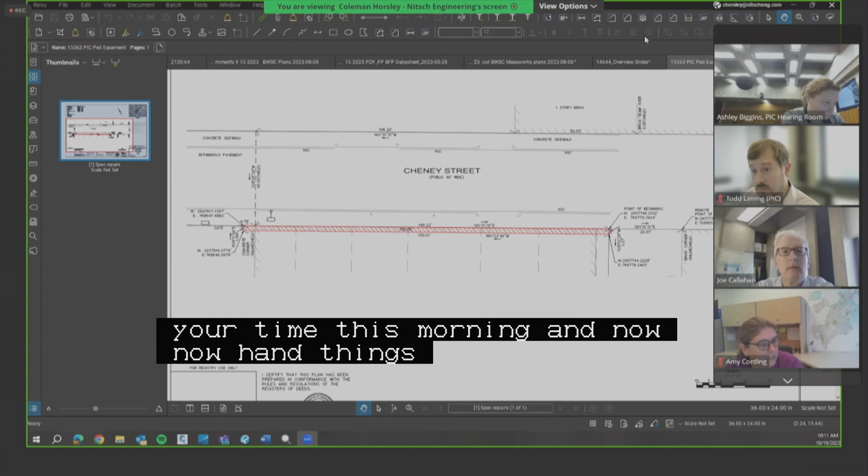As you can see on the screen right now, the first item is the pedestrian easement. We are proposing to set up a pedestrian easement to allow for a minimum of 5-foot accessible walk along Cheney Street. The easement limits are shown in the plan in front of you. There are no changes from the previous new business hearing.

Excellent, thank you very much. Commissioners, questions, comments? PIC staff or members of the public? PIC staff is all set. I will take this opportunity to remind the public, if you wish to ask questions or offer testimony, please use the raised hand function at the bottom of your screen. But I do not see anything at this time.

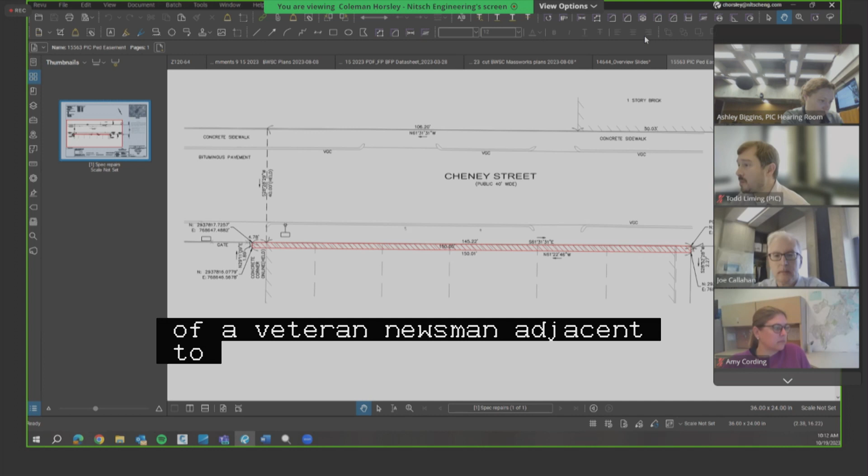Seeing none, do I hear a motion to approve public hearing number 1? I'll make a motion to approve a petition by Cheney Schuler LLC for the acceptance of a pedestrian easement adjacent to Cheney Street as read in the record by the chair. Second. All in favor? Aye. Aye. Aye. Any opposed or abstain? So moved.

On to public hearing number 2, a petition by Cheney Schuler LLC for the making of specific repairs within Cheney Street Public Way, Roxbury, located on its southwesterly side at address numbers 4 through 18, generally between Blue Hill Avenue and Hartwell Street, consisting of curb and sidewalk reconstruction, as well as new and relocated street lighting infrastructure, street trees, and driveway curb cuts.

This was new business on October 5th, as shown on a set of plans entitled City of Boston Public Works Department Engineering Division Specific Repairs Plan 4 through 18 Cheney Street, Roxbury, 2 sheets dated September 2023. Will the petitioners please reintroduce themselves and their affiliations and walk us through this action along with any changes that have been made since your last hearing?

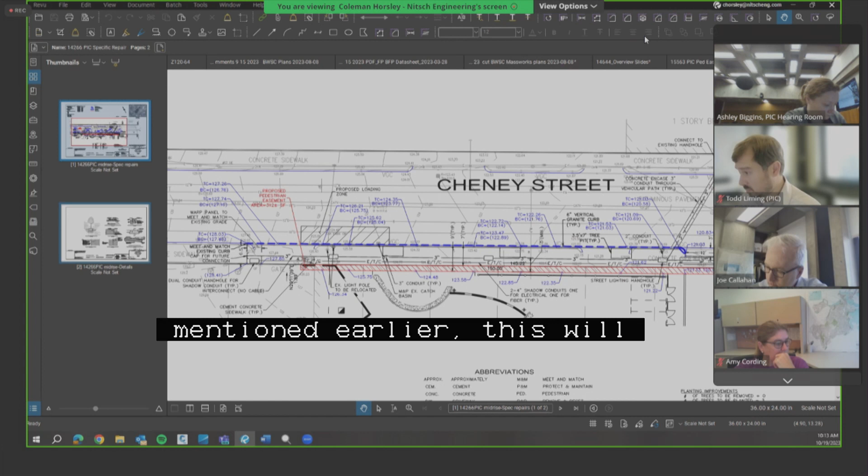Thank you. Again, Coleman Horsley, Nitsch Engineering, engineer of record for the Cheney Street project. This specific repair request is an extension of the sidewalk, so we are removing the existing building. As Ricky mentioned earlier, this will increase the sidewalk width for easier pedestrian access. As a result, we're also able to add 3 street trees as part of this process. We are providing a minimum of 5-foot clear width for the sidewalk behind the street trees and overall sidewalk width of 9 feet, including the street tree locations.

Also, we are revising the street lighting infrastructure and upgrading it to the newest standards and adding 2 street lights with crossings across Cheney Street. The curb will be reset and there will be a proposed loading zone out front for the PACE neighborhood citizens. Shadow conduit will be added in accordance with the Boston Smart Utilities program. There have been no changes from the previous new business hearing.

Thank you. Commissioners, questions, comments? Your loading zone should be signed but not striped. Sounds great. We'll do that.

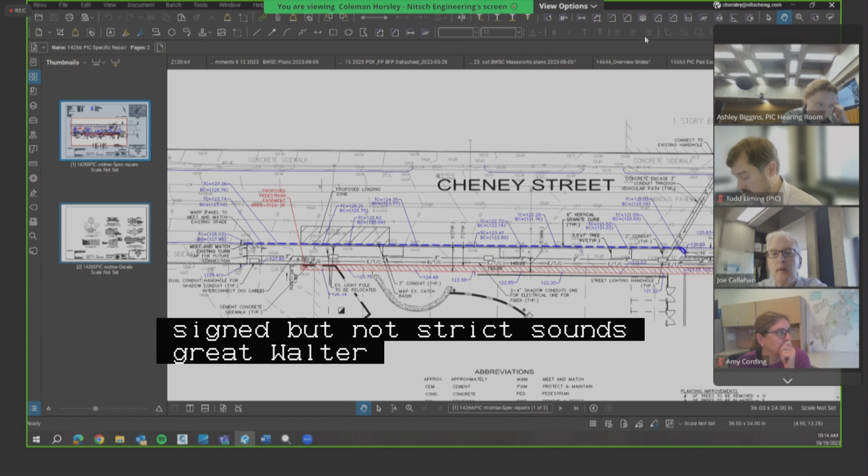Any other questions, comments? PIC staff or members of the public? All set? All right, do I hear a motion to approve public hearing number 2? I'll make a motion to approve a petition by Cheney Schuler LLC for the making of specific repairs within Cheney Street as read into the record by the chair. Second. All in favor? Aye. Aye. Aye. Any opposed or abstain? So moved. Thank you very much. Thank you.

On to public hearing number 3 on a petition by NStar Electric Company, DBA Eversource Energy, for the making of specific repairs within the following public ways in Dorchester and South Boston, consisting of curb realignment and reconstruction of the roadways, sidewalks, pedestrian ramps, and driveway curb cuts, as well as new and relocated storm drain infrastructure, speed humps, and raised crosswalks: Plaisted Road between Springdale Street and Savin Hill Avenue, Savin Hill Avenue between Plaisted Road and Denny Street / Grampian Way, as well as between Grampian Way / Evandale Terrace and Old Colony Terrace, Caspian Way at Savin Hill Avenue, Denny Street at Savin Hill Avenue / Grampian Way between Savin Hill Avenue / Denny Street and Savin Hill Avenue / Evandale Terrace, Evandale Terrace at Savin Hill Avenue / Grampian Way, Old Colony Terrace between Savin Hill Avenue and William T. Morrissey Boulevard.

Monsignor Dennis F. O'Callaghan Way, generally between Old Colony Avenue and Kemp Street, Dr. Michael Gavin Way at Monsignor O'Callahan Way, Kemp Street, generally between Monsignor O'Callahan Way and Major O'Connor Way, Major Michael J. O'Connor Way between Kemp Street and Dorchester Avenue at Major O'Connor Way, Father Songin Way, Father Anthony Songin Way between Dorchester Avenue and Boston Street, generally between Father Songin Way and Ellery Street.

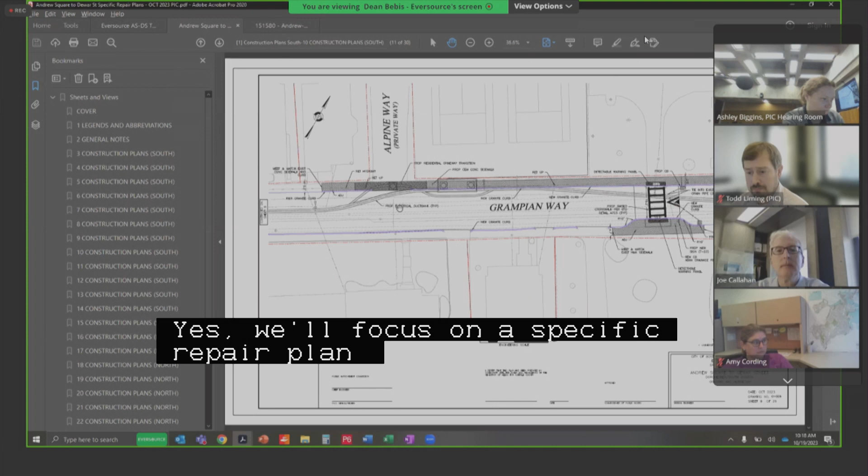That sounds good, so I will open the specific repair plan. We'll focus on the specific repair plan first, and then the next action will focus on the grant of location plan. This is the specific repair plan. I will scroll quickly through the work and then focus on our mitigation efforts. Can everybody see my screen?

Yep, okay excellent. So here we are starting in Springdale, the northernmost section of the site. We travel through Plaisted Road, then we head on to Savin Hill Ave.

And here we begin our portion of mitigation effort, with these additional curb lines and sidewalk repairs. This is no change for new business, so this is part of our mitigation effort here, with a few catch basin movements, curb lines, and additional crosswalks. Any questions on this page?

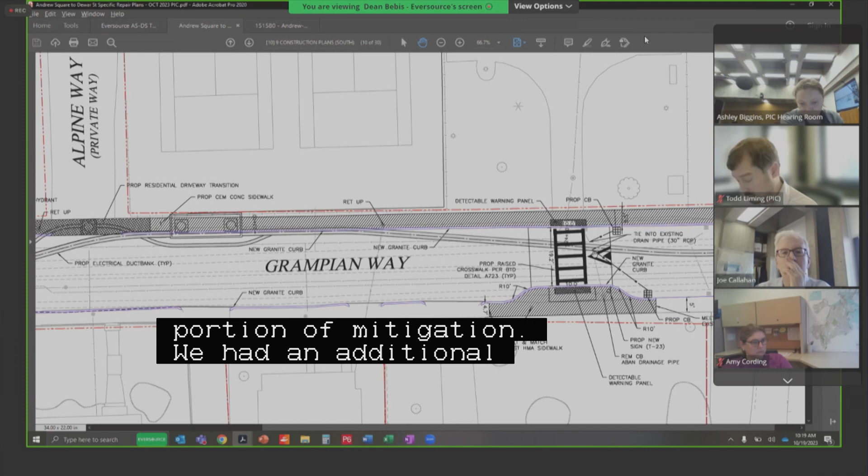Okay, thank you, moving on, Grampian Way. This is a new aspect from our previous specific repair plan. We have specific callouts for the protection and potential adjustments to the pavement adjacent to these ancient trees. I believe this was included by the Parks Department, so this was included in our specific repair plan update.

Okay, moving on, we have these rebuilds. Nothing new here except additional mitigation to protect these trees and root systems with our sidewalk. We will have an arborist on hand when we're excavating. Our bond crew will excavate in such a way to protect the tree and its root system. We do have our licensed arborist, Chris Hayward, on the phone, and he will be attending the project construction to ensure the protection of these trees.

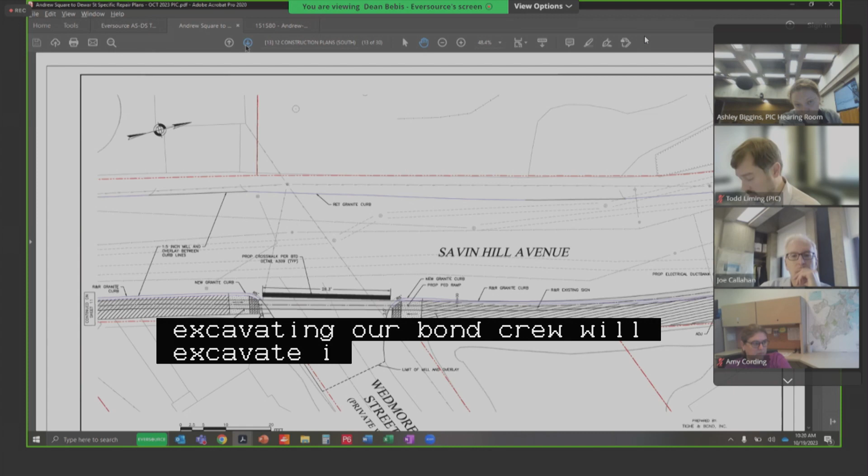Savin Hill, no updates. Savin Hill Ave, based on the comments we received last week, we moved our crosswalk to align with the existing crosswalk. You can see the existing ladder here, and our new ladder will be in the same spot, similar to what's existing. But this is a new raised crosswalk, which was mitigation, and then here we have another speed hump.

Okay, now we're moving on to the intersection between Old Colony Terrace and Morrissey Boulevard. No new updates here. We're going to be moving on to the MEM, Mary Ellen McCormack, and as part of our discussion with additional ramps, I will go through the additional portions or modifications to the specific repair plans since new business.

Here we're going to repair a piece of this ramp, concrete flange, and these are a culmination of a few site visits with the city about the pedestrian ramps to ensure that all pedestrian ramps are up to code along the route.

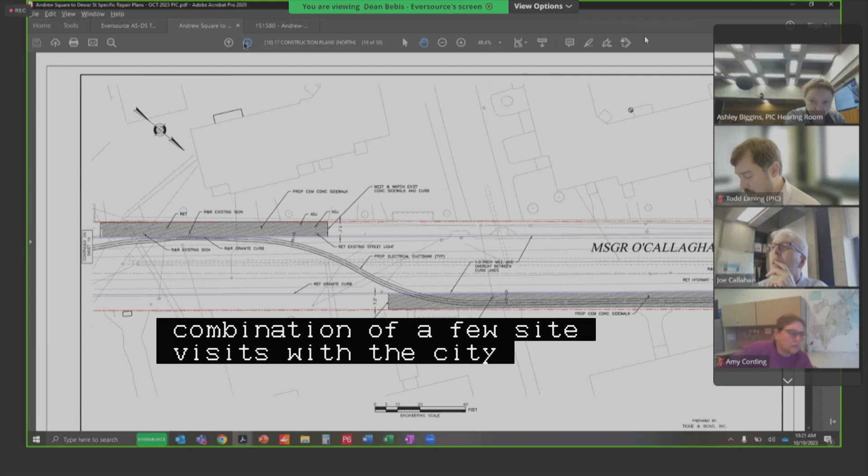No new updates here. Here we're replacing several DWPs, which are detectable warning panels, as these are not meeting code, and you can see them highlighted, I can zoom in. Ongoing, again you see some callouts here, additional repair of a DWP, 2 additional DWPs in Kemp Street.

And then also we have additional DWP repairs here, concrete flange here. These 2 DWPs and this concrete flange will be repaired. Those are new.

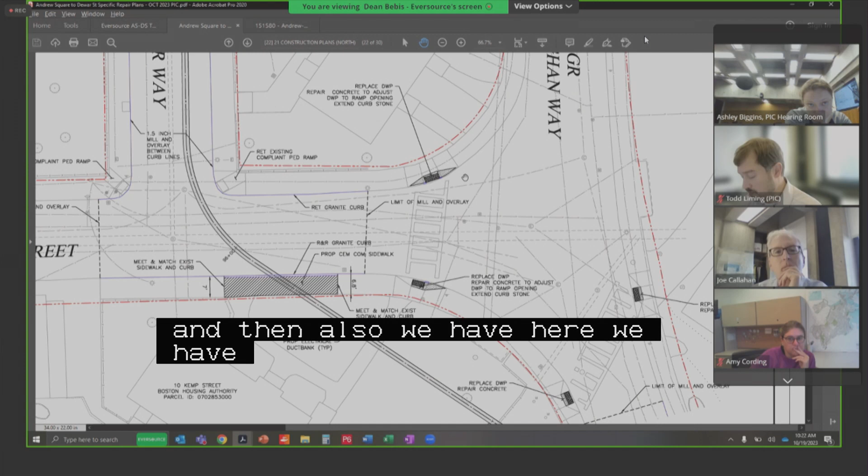Sidewalk repair, nothing new here. Sidewalk repair. This intersection, we're repairing this and a potential curb line here on this DWP.

Do you mind, was it with the curb ramp team? We met out there with Mike, I forget his last name. Mike Sinclair? Mike Sinclair, yeah. Great, okay. Really, really great, great to work with. So, fantastic, this was a combination. Thank you. Okay.

All right, and this is the completion into Andrew Square. Any questions from the commissioners?

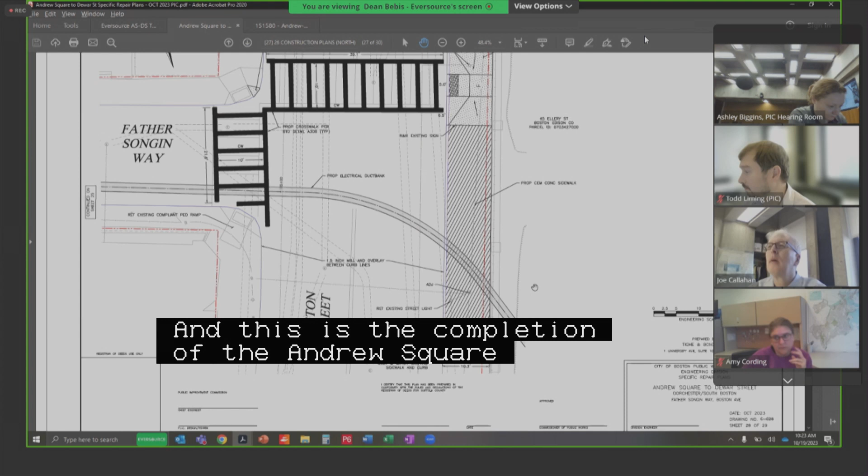No, I just wanted to also note that Eden from the Eversource team reached out to us regarding accessible parking spaces along O'Connor Way, and we're working through the details on that and looking forward to diving in to ensure that those parking spaces are relocated for construction. Absolutely.

Okay, no more questions. If there's no more questions, commissioners, I'll move on to the GOL. We need to vote on the specific repairs first. Let me just check with Todd, PIC staff, members of the public. Anyone else have a comment or question? I'm all set. Amy, was that you that chimed in? Yeah, no, we're all, I mean, these are largely our asks, so we're good. Yeah, I think we're all set.

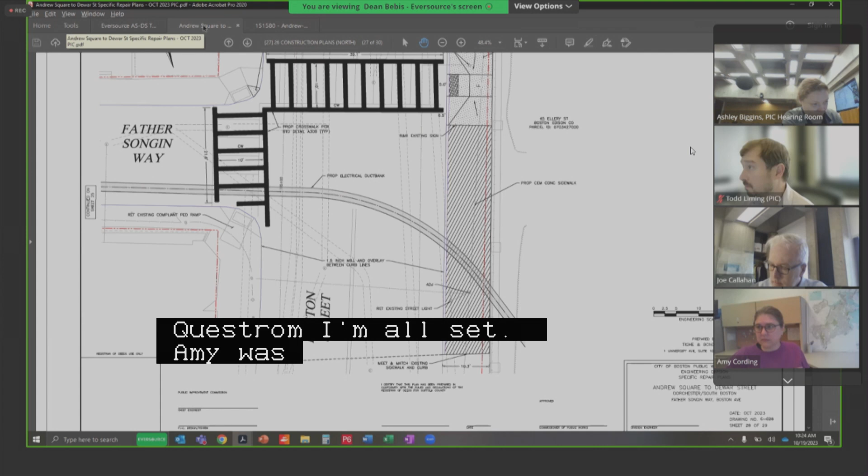All right, I will just say I very much appreciate all the effort that's gone in here. This has been a very long process, and I appreciate the folks at Eversource working through these many streets with us and getting to a reasonable mitigation plan for the residents that will be affected by this construction. So thank you for that. And with that, do I hear a motion to approve public hearing number 3?

I'll make a motion to approve a petition by NSTAR Electric for the making of specific repairs in Playstead Road, Savin Hill Ave, Caspian Way, Denny Street, Grampian Way, Evandale Terrace, Old Colony Terrace, Monsignor Dennis O'Callaghan Way, Dr. Michael Galvin Way, Kemp Street, Major Michael O'Connor Way, Dorchester Ave, Father Anthony Songin Way, and Boston Street as read into the record by the chair.

Second. All in favor? Aye. Aye. Aye. Any opposed or abstained? So moved. On to public hearing number 4.

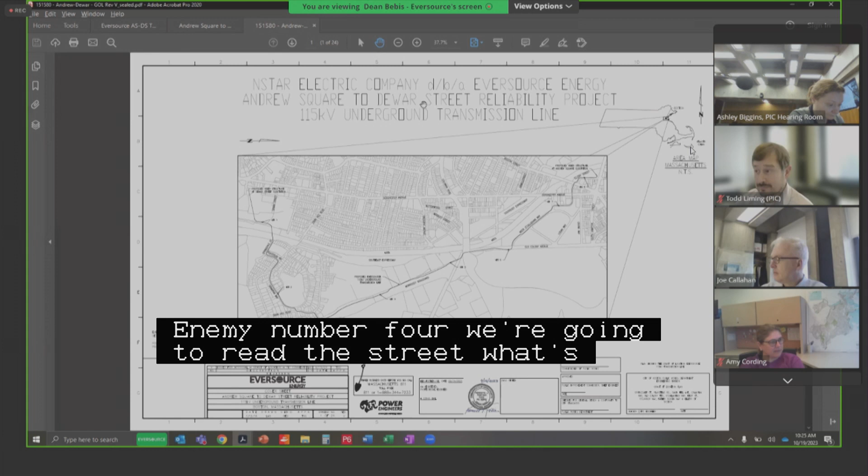We're going to read the street list again. Here we go. On a petition by NSTAR Electric Company, DBA Eversource Energy, for a grant of location to install a new electrical transmission line and associated infrastructure within the following public ways in Dorchester and South Boston: Playstead Road between Springdale Street and Savin Hill Avenue, Savin Hill Avenue between Playstead Road and Denny Street / Grampian Way, as well as between Grampian Way / Evandale Terrace and Old Colony Terrace, Grampian Way between Savin Hill Avenue / Denny Street and Savin Hill Avenue / Evandale Terrace, Old Colony Terrace between Savin Hill Avenue and William T. Morrissey Boulevard.

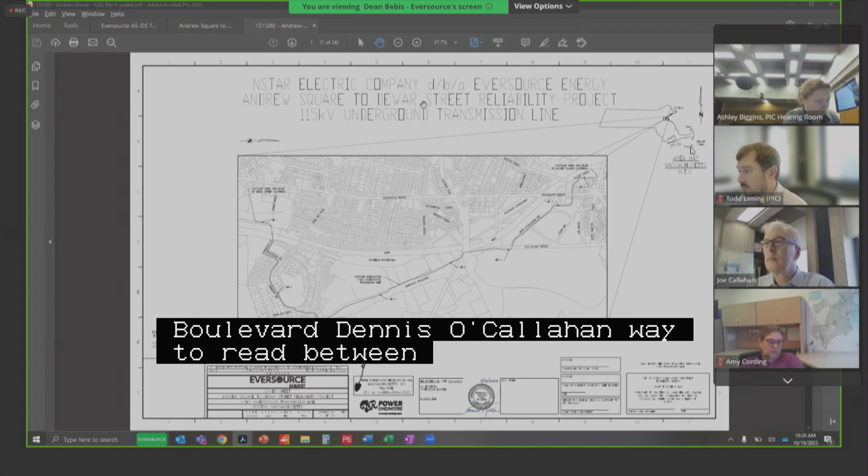Monsignor Dennis F. O'Callaghan Way, generally between Old Colony Avenue and Kemp Street, generally between Monsignor O'Callahan Way and Major O'Connor Way, Major Michael J. O'Connor Way between Kemp Street and Dorchester Avenue at Major O'Connor Way / Father Songin Way, Father Anthony Songin Way between Dorchester Avenue and Boston Street generally between Father Songin Way and Ellery Street.

New business from October 5th, 2023, as shown on a set of plans entitled City of Boston Public Works Department Engineering Division, grant of location plan, Springdale Street, Playstead Road, Savin Hill Avenue, Grampian Way, Old Colony Terrace, O'Callahan Way, Kemp Street, O'Connor Way, Father Songin Way, and Ellery Street, Boston, 24 sheets dated September 15th, 2023.

Would the petitioners please reintroduce themselves and their affiliations, and then give us a brief overview of the grant of location action and any changes since your last hearing.

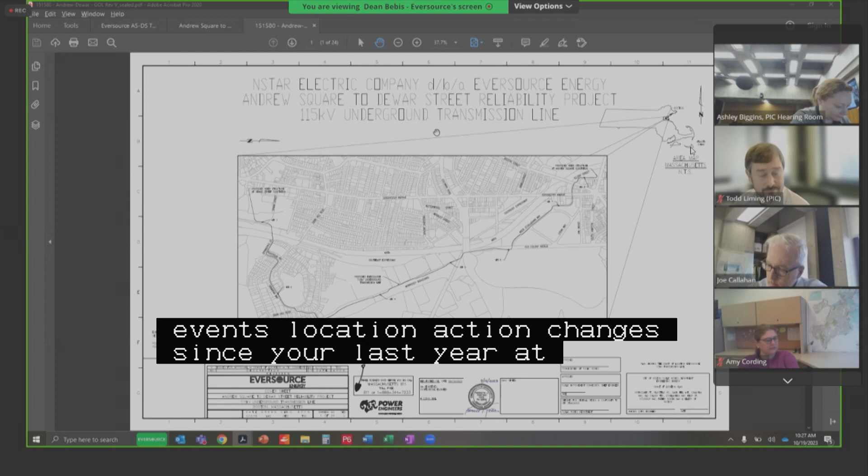Dean, you're muted. Hi, my name is Dean Bebis, Project Manager, Eversource. I'm here to represent the Andrew Square Dewar GOL, covering the streets just mentioned. This is an underground transmission line connecting the Andrew Square to Dewar Street substation. Excavation depths approximately 4 to 5 feet, with some variations due to utility crossings. Also in my team, I have Aaron Wells, Chris Hayward, and Greg Lucas from Tighe & Bond.

If it's okay with the commission, I can go through the GOL here, the GOL statement. Yep, please proceed.

Okay, so these are the overview plans. Our GOL really starts here in Playstead Road. This is the northernmost section of our utility line. As you can see, we travel through Springdale Street into Playstead Road. And also on the top, if you look and observe, you can see the plan and profile for an average depth.

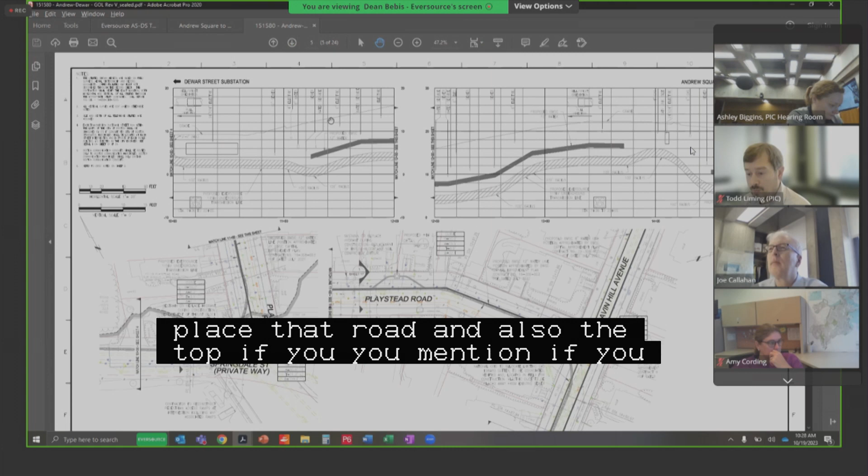The hatch mark is the depth of our utility, and ground surface is the uppermost line. So you can see it's an average of 5-6 feet, but we do have several utilities, and these are called out along the path.

The plan and profile, the profile is synonymous with the path of the line beneath it. So we're going to go through. It's page 1 on the Playstead. It's page 2 in the Savin Hill and Grampian Way. As you can see, we're accounting for the new BWSC work, and then gas main work.

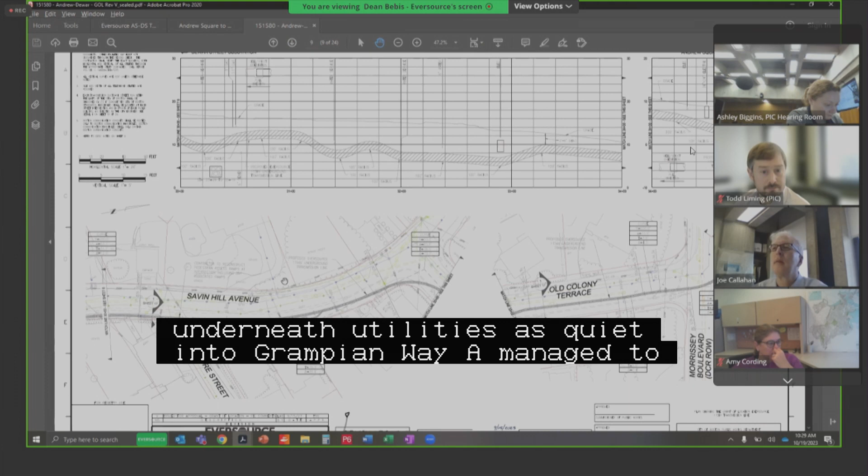And then we're traveling up over utilities, and underneath utilities as required, into Grampian Way. We have manhole 2. Then we go through Savin Hill Ave, and this is Savin Hill Ave and the Old Colony Terrace. Okay, moving on, then we're going to be heading up into the MEM and the Old Colony Way. This is manhole 6.

O'Callahan Way, in the intersection of Gavin Way. We have some deep utilities here which we'll be traveling under. Again, O'Callahan Way into Kemp Street and O'Connor Way with manhole 7. O'Connor to Father Songin Way, Boston Street, and with completion in Ellery Street.

That's all the presentation. All right, commissioners, questions?

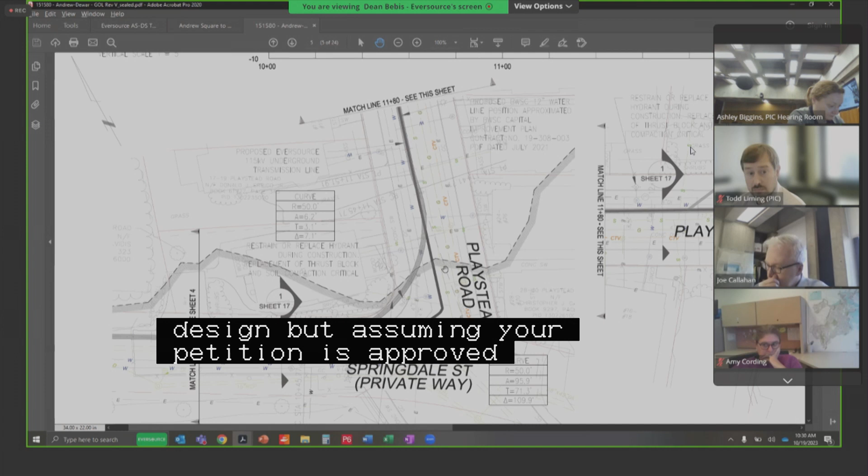I wish it was a simple question. Yes, we absolutely do, and we've been working with the BWSC to facilitate the work. We've been in contact with BWSC members, I don't have their names right off the top of my head, but once we have a schedule, we'll be working with BWSC and communicating that very clearly. So our hope is to continue street excavation as long as we can. Ultimately it might be next season, might be this winter, but we'll be in touch with BWSC for sure. Thank you.

Commissioners, other questions? PIC staff or members of the public?

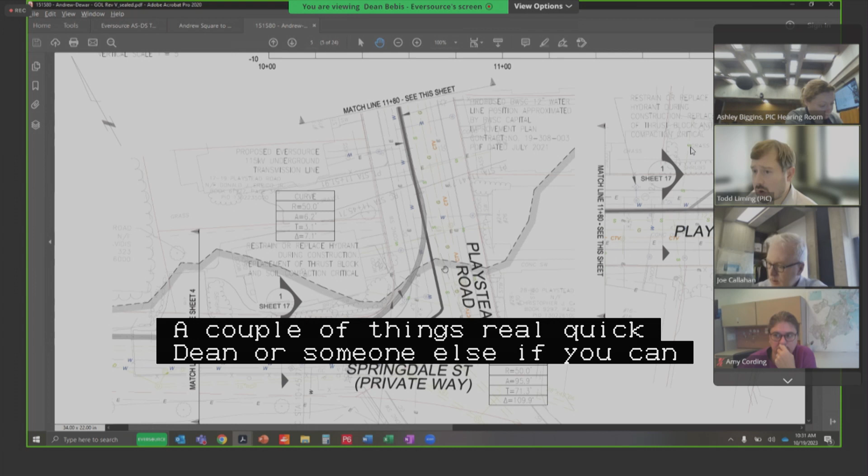Couple things real quick. Dean or someone else, if you could maybe speak to your coordination with BHA regarding the on-site work, as some of that work falls outside of the public right-of-way, and also if you can speak to your coordination with the Parks Department regarding your installation within Springdale Street, which is a private way abutted by the Parks Department. Okay. Yes, is Meredith on?

Okay, that's fine. I am, Dean. Okay, I'm sorry, I was struggling with the mute. I'm happy to speak to Mr. Liming. I'm happy to speak to our coordination with Boston Housing Authority.

We are in constant communication with that group. We have meetings scheduled every other week to discuss progress, along with general outreach within the Mary Ellen McCormack community, including tabling at the Fresh Truck events throughout the summer. And we'll be working closely with them along with Boston Public Schools as we get into the construction aspect at the Mary Ellen McCormack housing development.

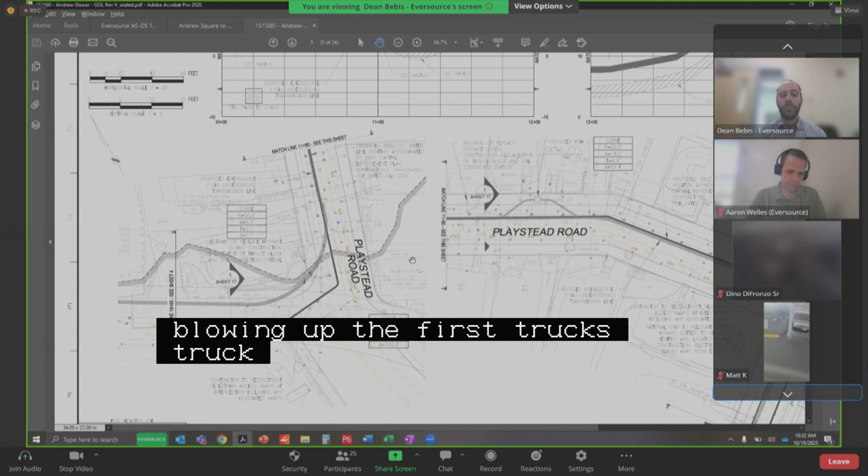So we did indeed meet with BPS yesterday, thank you Meredith. Aiden and Meredith's team is working very closely with them, and they also asking for schedule updates immediately. As part of that, as we mentioned earlier, we're working with the handicap spots in that area, so we're working with those crews. It's very important to us that things go smoothly in that area and this area in place there.

Now, in terms of Springdale Street, we do have an easement. We are working with Boston Parks. They are included in our notifications for any construction start or stop, so they are also in close communication with the project overview.

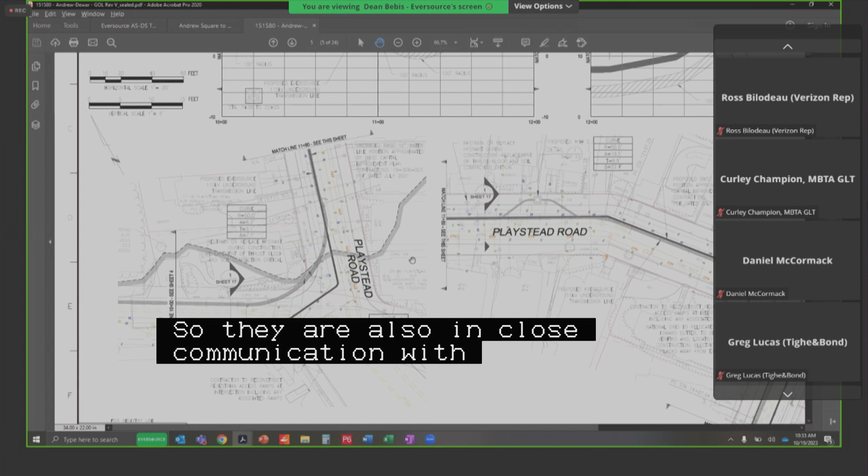Thank you, I appreciate you giving those updates and putting all that information on the record. I don't have anything else.

All right, seeing no raised hands, do I hear a motion to approve public hearing number 4? I'll make a motion to approve a petition by NStar Electric, DBA, Eversource Energy for a grant of location in Playstead Road, Savin Hill Ave, Grampian Way, Old Colony Terrace, Monsignor Dennis O'Callaghan Way, Kemp Street, Major Michael O'Connor Way, Dorchester Ave, Father Anthony Songin Way, and Boston Street is read in the record by the chair.

Second. All in favor? Aye. Aye. Any opposed or abstain? So moved. Congratulations, thank you.

Hey, thank you, I do have a question. Thank you, commissioners, for all your time and effort on the GOL. We would like to get digging as soon as we possibly could. So how could we facilitate submitting our street opening permits immediately?

Reach out to me and I'll help you. Thank you so much, Todd. Yeah, give me a call this afternoon. Commissioners, really appreciate it. All right.

Thanks everybody. All right, on to public hearing number 5, on a petition by Verizon New England Incorporated for granted location with lead company status and no participants to install new telecommunication conduit with city shadow within the following public ways in Boston proper.

Canal Street, generally at address number 1, between Valenti Way and New Chardon Street, Anthony Rip Valenti Way at Canal Street. This was new business from October 5th, as shown on a plan entitled City of Boston Public Works Department Engineering Division Granted Location Plan, Verizon 1 Canal Street Proposed Conduit Installation, 1 sheet dated September 2023.

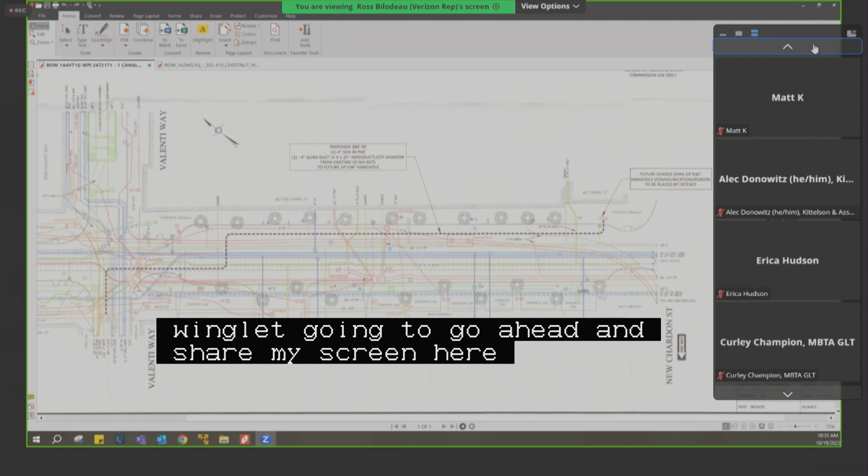So again, Verizon is proposing about 388 feet of new conduit from our existing manhole 375, which is located on Valenti Way, up around the corner to a future shared handhole on Canal Street. We're proposing 1 4-inch Schedule 40 PVC duct with a quad city shadow duct.

Since the last time we were out here doing this work to get ahead of the paving project that was happening, our work and conduit and everything was in by the end of business on 10/6, which was 2 weeks ago tomorrow.

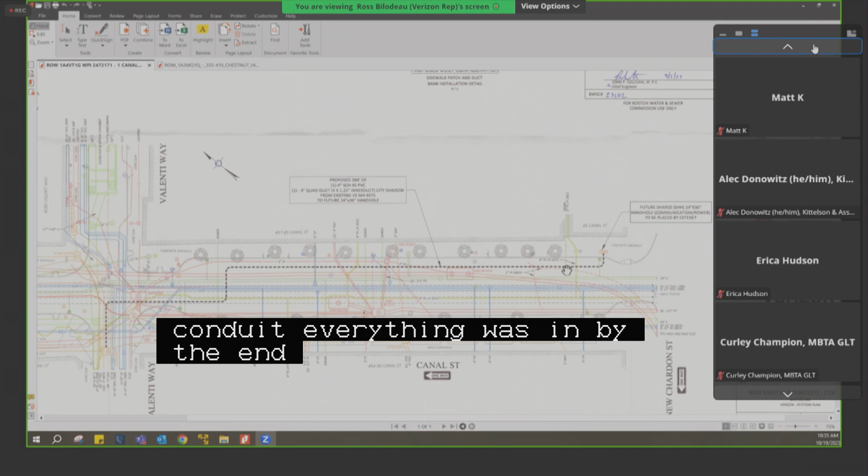Excellent. Commissioners, questions, comments? Do I see staff or members of the public? All set. All right. Do I hear a motion to approve public hearing number 5?

I'll make a motion to approve a petition by Verizon New England for granted location in Canal Street and Anthony Rip Valenti Way, as read into the record by the chair. Second. All in favor? Aye. Aye. Any opposed or abstain? So moved. Thank you very much.

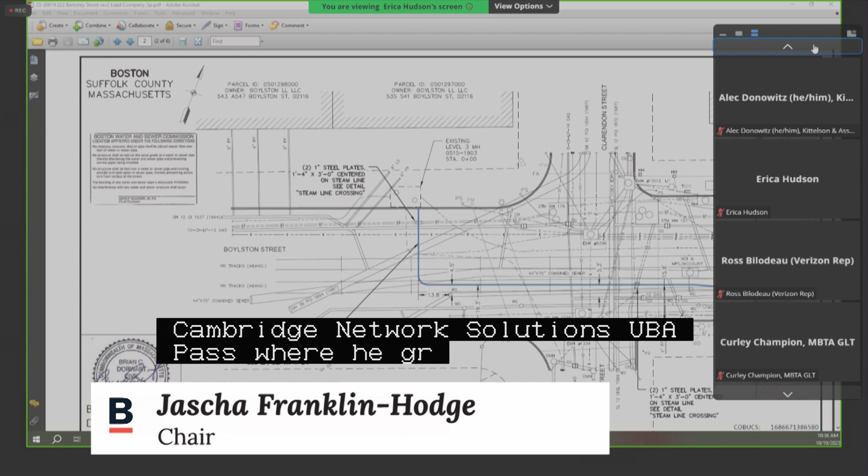Thank you. On to public hearing number 6, on a petition by Cambridge Network Solutions, DBA Lightpath, for a granted location with lead company status and no participants to install new telecommunication conduit with city shadow within Boylston Street Public Way, Boston proper, located generally between Dartmouth Street and Berkeley Street.

This is new business, was new business from October 5th, as shown on a set of plans entitled City of Boston Public Works Department Engineering Division Granted Location Plan. Proposed lateral conduit placement, 222 Berkeley Street, 4 sheets dated July 21st, 2023. The petitioners please introduce themselves, their affiliations, and give us a brief reintroduction to what is being proposed.

Good morning, members of the PIC. My name is Erica Hudson. I'm with Sienna Engineering Group, and I am presenting on behalf of Cambridge Network Solutions. And with me is my colleague, Tom McGresta, as well. So Cambridge Network Solutions is seeking grant of location on Berkeley Street to place telecommunications conduit.

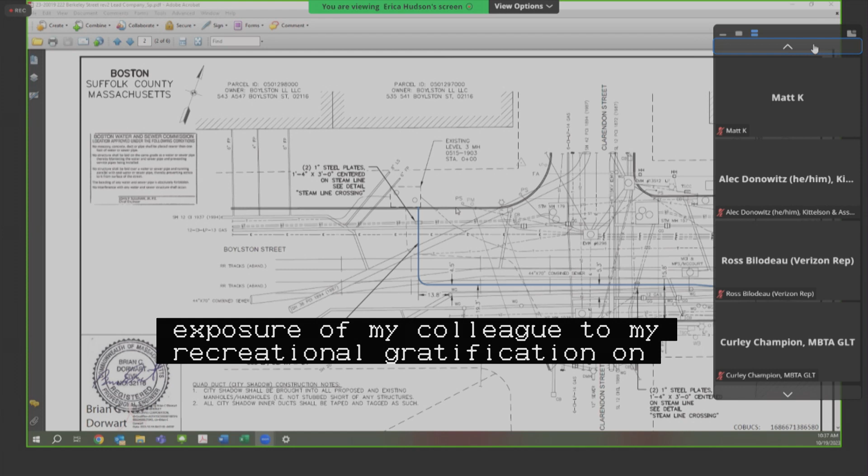The proposed conduit installation will start at level 3, manhole number 0515-1903, which is in front of 541 Boylston Street. The conduit will continue southeast on Boylston Street past Clarendon Street to the property line. This conduit will consist of 1 4-inch scheduled 40 PVC conduit, 1 4-inch quad duct, and 2 1-inch steel plates.

The conduit will continue from the property line to Berkeley Street, where it will terminate at 222 Berkeley Street at that building. That will be approximately 51 feet.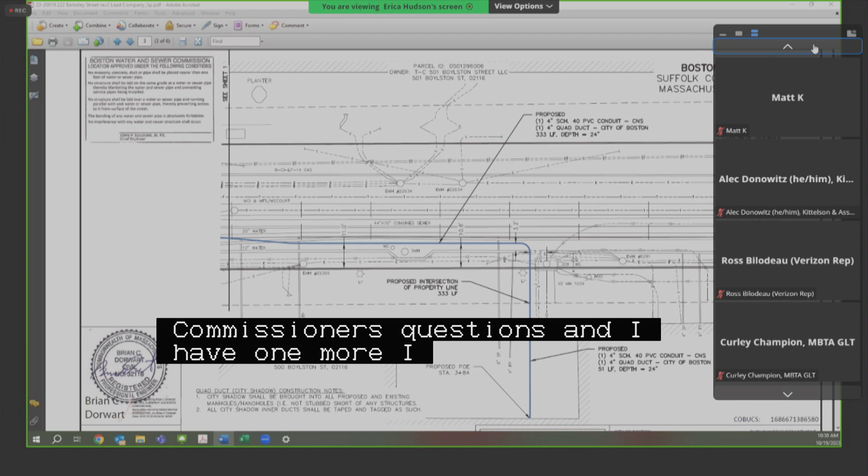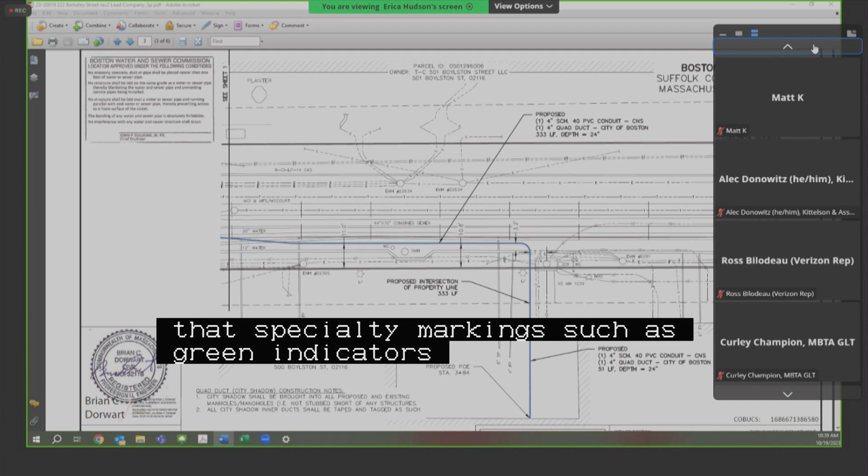Got it. Thank you. I will ask two questions. First, the city is preparing to install a bike lane and bus facility that will involve pavement markings along Boylston Street, which may be disturbed by this work, assuming we install our stuff before you. Will you commit to ensuring that specialty pavement markings, such as green indicators for bike lanes or red for bus lanes, is restored after the completion of construction here? Yes. Okay. And then, thank you.

And then the second question, similarly, the sidewalk along Boylston Street in that block between Clarendon and Berkeley has a number of specialty materials associated with it, and I wanted to confirm that you will be fully restoring the sidewalk in kind, with all of the existing specialty materials put back as they're currently designed. Yep, the contractor performing this work is aware that all services will need to be restored, and sidewalk restoration will need to be completed as well.

Excellent. Thank you. Commissioners, any other questions? I have a question, Peter Salvatore, Boston Water and Sewer. We have, our approved plan on file shows a different alignment than this.

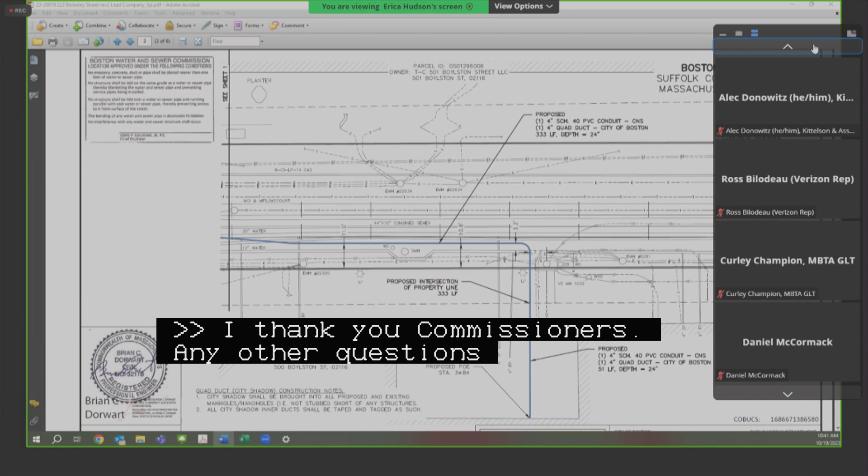So I guess I have two questions. Do you have the plan you're presenting now approved by Boston Water and Sewer, or do you plan to amend it? Because I'm comparing the two, they're under the same COBUCS number and the same address. So we added the property line, but this is the same plan.

Okay, because the one I'm looking at shows you connecting into the Verizon manhole 1038. It doesn't show that additional piece going. I'll have to double check that, but we're only coming out of the level 3 manhole, not Verizon.

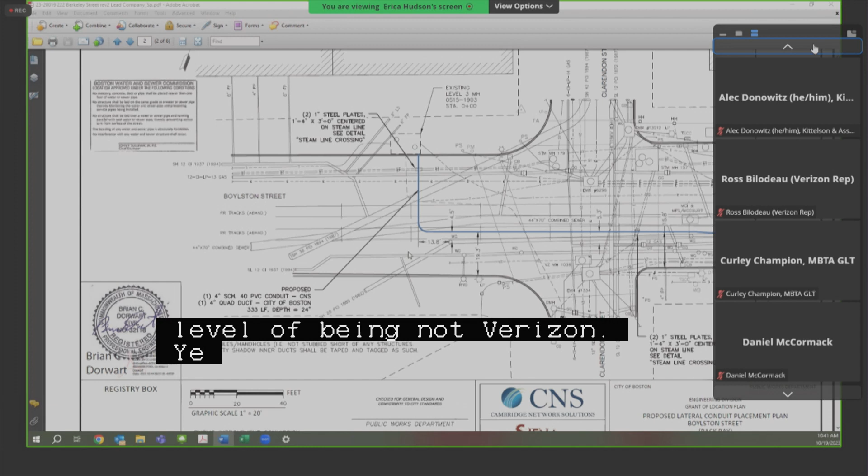The one comment I'd have is that the way you're crossing our water mains, we prefer a perpendicular crossing. You're crossing over a very extended path, both our 20-inch water main and our 12-inch water main. Okay.

So we will make sure that we don't intersect with that, and also what would be needed on our end for you guys. If you could just modify that crossing near your match line where it says C sheet 2 — do you see how you're crossing our pipes for quite a distance? If you could shorten that crossing and make it more perpendicular.

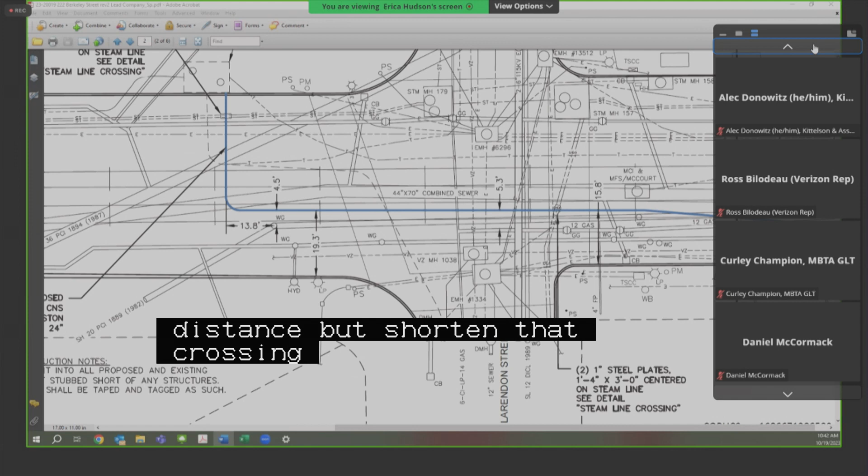And you're talking about where my cursor is right here? Correct. Okay, if I can jump in for a quick second and share my screen.

I do have a copy of the signature from Boston Water and Sewer showing this running line, if you'd like to see that, Peter. No, I believe you. If you could modify it, that would be great, but I'm not going to hold you up — it's just a comment. Okay, yeah, we can definitely make those changes and try to accommodate that request.

It's a heavily congested area, so we're trying to avoid as many facilities as possible. We'll look into possible alternatives. Okay, thank you.

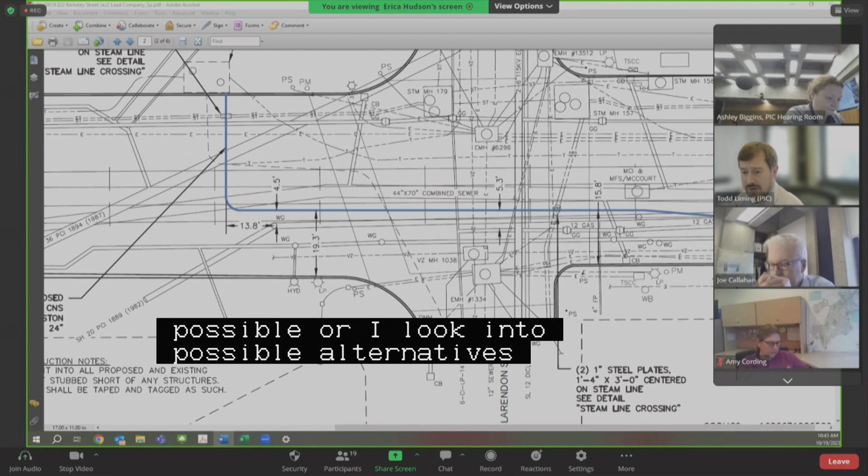So Tom and Erica, if you can make those updates, run them by Peter, and then after Peter gives an okay, submit those on Mylar to PIC staff, please. Okay, will do. Peter, does that work for you? Yeah, that's fine. Great.

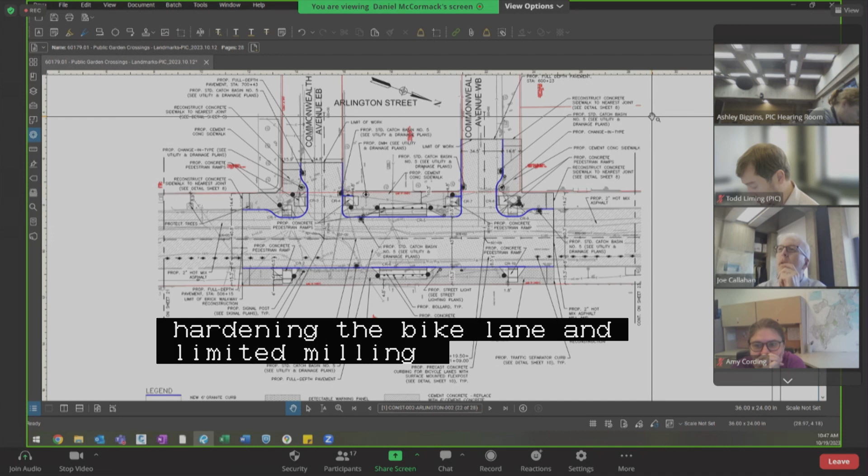So our work begins at the corner of Arlington Street and Boylston Street, and most of the work here is just flex post hardening for the bike lane and limited mill and overlay for pavement repair, with striping coming after. Our majority of new work is at intersections. The first intersection with work is the Comm Ave Arlington Street intersection, where we're doing some curb extensions, some widening of crosswalks, and some signal repair and hardening the bike lane with flex posts.

And moving northwards along Arlington Street, we are doing a curb extension at Marlborough Street to accommodate better pedestrian ramps, more aligned with the crosswalks. Similar work in the roadway with mill and overlay and hardening the bike lane.

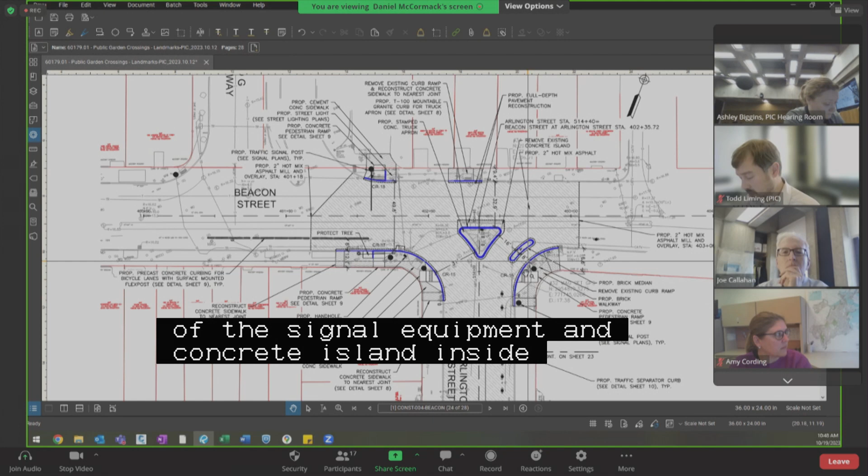And then moving north, we are at the Arlington Street, Beacon Street intersection. Similar character of work being done here, improving pedestrian crossings, removal of the signal equipment, and concrete island inside of Beacon Street, replacing it with a stamped concrete truck apron, hardening for the bike lane on this corner, similar mill and overlay with pavement striping. So all of the bike lane will be striped according to the city's standard details.

And then we're moving to the east now on Charles Street. We are doing a repair of the sidewalk on the west side of the road, matching the similar condition that's out there right now of the brick sidewalk. And then the same type of treatment with pavement markings, mill and overlay, and hardening of the bike lane.

And then moving north, we're at the mid-block crossing for Charles Street. We are improving this pedestrian crossing, improving with concrete medians, and widening the crosswalk with better pedestrian signal and pavement striping.

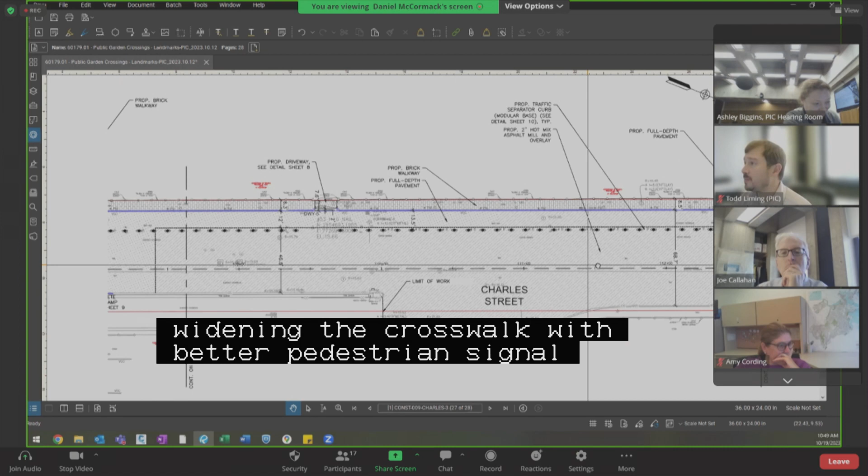And then moving north, we are doing the same work on Charles Street. And then as we get toward the Charles Street, Beacon Street intersection, we are proposing the same type of work as we've done elsewhere, with limited work past our match line. We are not doing any pavement work up above my cursor.

Commissioners, questions? None?

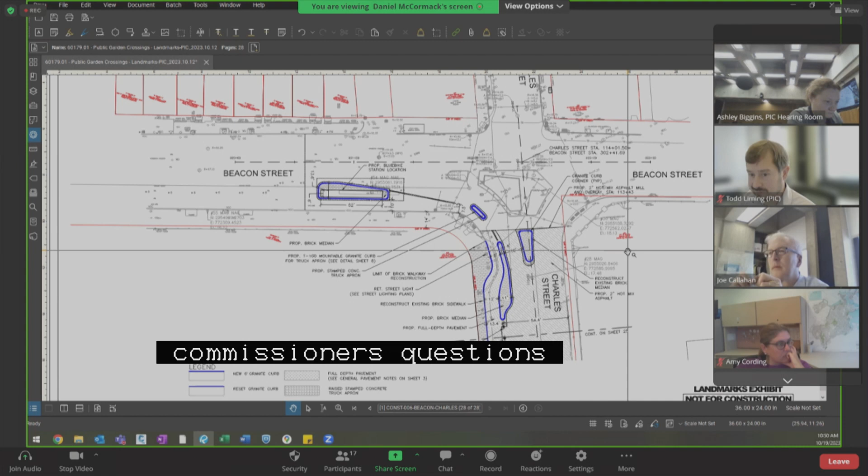I will ask one. There's been quite a bit of linear utility cut work done along Charles Street in the area of the bike lane recently. There's a number of trenches that have been patched there. Can you tell me about the extent of the planned mill and overlay work as it relates to Charles Street specifically?

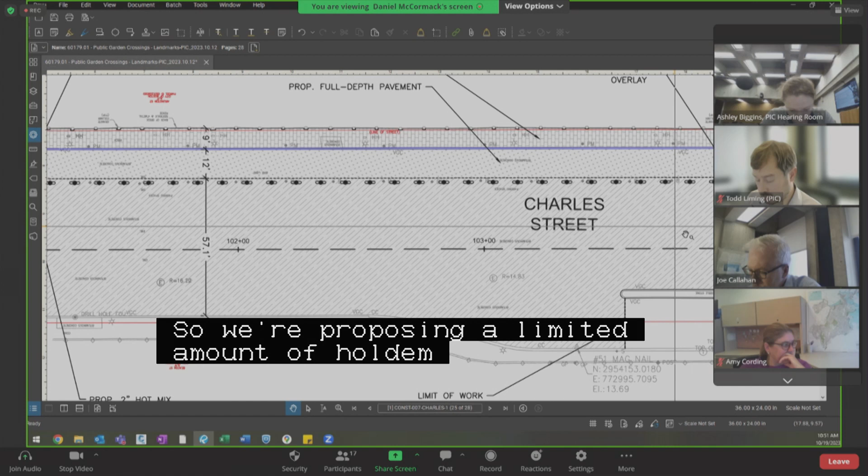Sure. We are stopping our work short of the Boylston Street intersection, and as part of our final design, there is improved grading being done, so it's a little hard to see, but on the north side, we've recognized that the pavement quality and the slopes are not optimal, so we're proposing a limited amount of full depth pavement and mill and overlay. We've been working with Public Works on identifying the extent of a mill leveling course to account for these types of issues.

So a regrading plan is part of our final package, which will describe the final pavement condition. Okay, excellent. Thank you. Just for a little more context there too, part of that full depth on that side is so that we can make the sidewalk along the public garden crossing there ADA compliant. We are going to be replacing all of the brick on that west side and making it much more walkable and inviting to pedestrians on that side. Wonderful.

All right, any other commissioners, any other questions, comments? PIC staff or members of the public? I think we're all set with this one.

All right, will you be ready for your public hearing in 2 weeks on November 2nd? Yes. All right, we will see you back here then for this one.

On to new business item number 2, Pleasant Street, Heston Terrace, Morrill Street, Victoria Street, Mayfield Street, Willis Street, Taft Street, Howes Street, East Cottage Street, Pond Street, Dorchester, specific repairs on a joint petition by the City of Boston Transportation Department and the City of Boston Public Works Department. Would the petitioners please introduce themselves, their affiliations, and give us an overview of the project as well as the specific repairs being proposed.

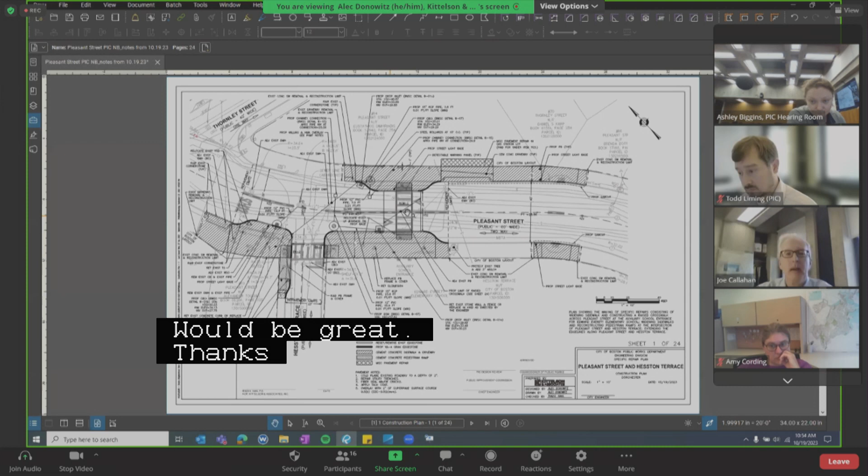All right, so we can walk through sheet by sheet. First, at Pleasant Street near the Heston Terrace intersection and in front of the Edward Everett Elementary School, we're proposing a realignment of edge lines and a raised crosswalk aligning with an auxiliary entrance to the school.

Continuing to the Heston Terrace intersection, we are proposing to reconstruct the pedestrian ramps to be compliant and a little wider than the existing ramp throats to facilitate pedestrian travel. We are proposing edgeline realignment on Heston Terrace, and also proposing to relocate the existing driveway adjacent to 69 Pleasant Street to better protect an existing fire hydrant and better align with the property line between 69 Pleasant Street and the adjacent property.

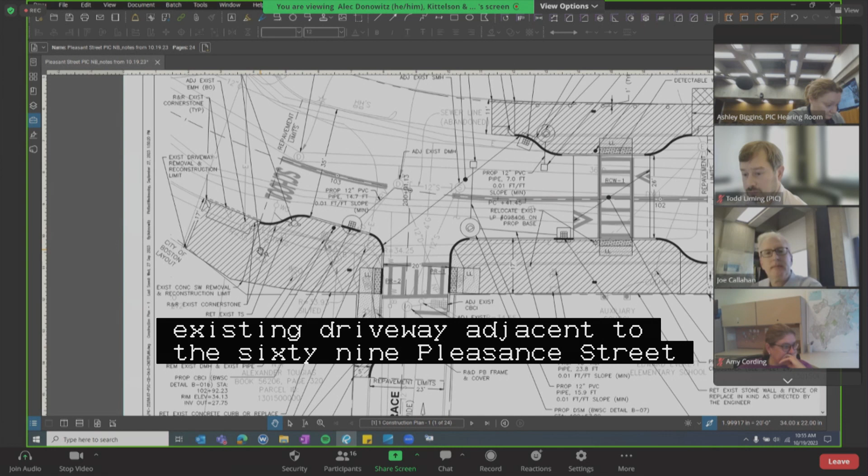We are also proposing a few drainage improvements in the area and adjustments, and have worked with the Public Works Department's street lighting division to reconfigure much of the street lighting conduit and light pole locations in the area. Hearing no questions, I'll continue on to the next location.

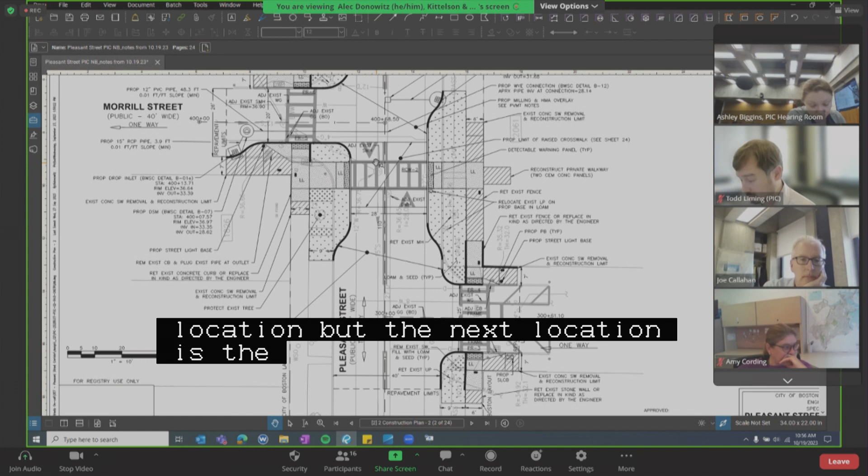The next location is the intersection of Pleasant Street and Victoria Street, and also Morrill Street nearby. We're proposing edgeline realignments along Pleasant Street as well as along Victoria and Morrill Street, and a raised crosswalk closer to the Morrill Street intersection across Pleasant Street.

We are also proposing to reconstruct the ramps across Morrill Street and Victoria Street where those two streets intersect with Pleasant Street, and adding some drainage infrastructure as necessary due to curb extensions, eliminating existing inlets, and due to the raised crosswalk impacting existing grading of Pleasant Street.

We are also proposing to do some substantial street lighting work in the area, coordinated with the street lighting division. And as you'll see along the rest of the plans as we continue, we are proposing loam and seed areas in much of the added curb extension space to reduce impervious surfaces, as there's already a planted grass strip along Pleasant Street on either side, separating the sidewalk from the roadway.

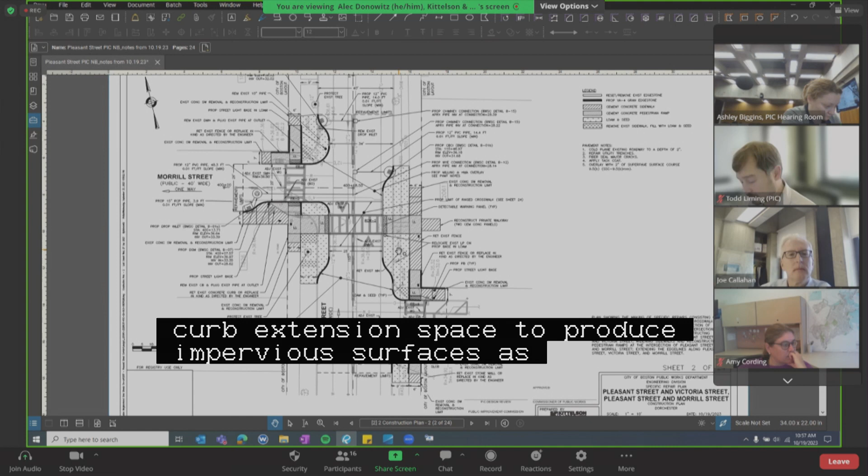Next is the intersection between Pleasant Street and Mayfield Street. We are proposing to realign the edge lines along Mayfield Street and Pleasant Street, and proposing raised crosswalks across Mayfield Street across either leg at the intersection.

This was to achieve accessible ramps, given the close quarters at the corners, particularly in the planned southeast corner. There is an existing tree pit that we wanted to accommodate while being able to provide a minimum pinch point of a 4-foot sidewalk in the curb extension.

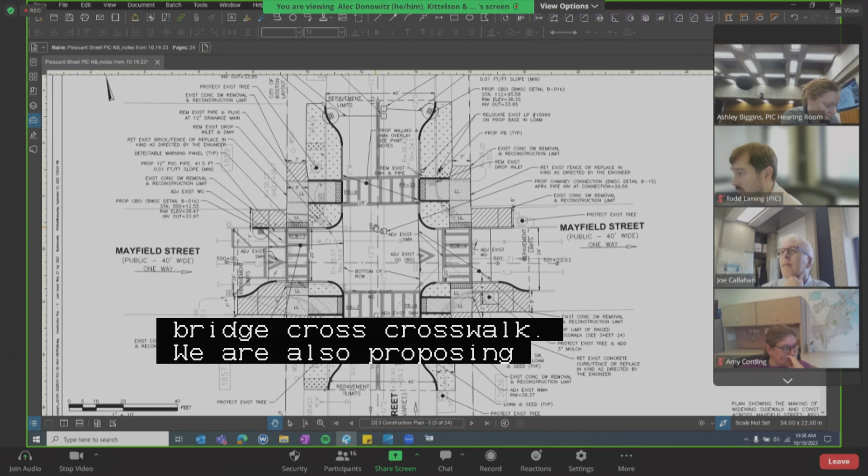In order to accomplish that end grade and accessible crossing across Mayfield Street, we propose a raised crosswalk. We are also proposing to reconstruct the pedestrian ramps crossing Pleasant Street at this intersection, both north and south of this intersection. We are also proposing at this location more limited street lighting work, just one light pole relocation, and drainage infrastructure as in the other locations.

Continuing on to the intersections between Pleasant Street and Taft Street and Pleasant Street and Willis Street, we are proposing to realign the edge lines along Pleasant Street, Taft Street and Willis Street.

We are proposing to reconstruct the pedestrian ramps crossing Taft Street at the intersection of Pleasant Street, as well as a raised crosswalk across Pleasant Street closer to the Willis Street intersection, and also proposing to reconstruct the pedestrian ramps across Willis Street at the intersection with Pleasant Street.

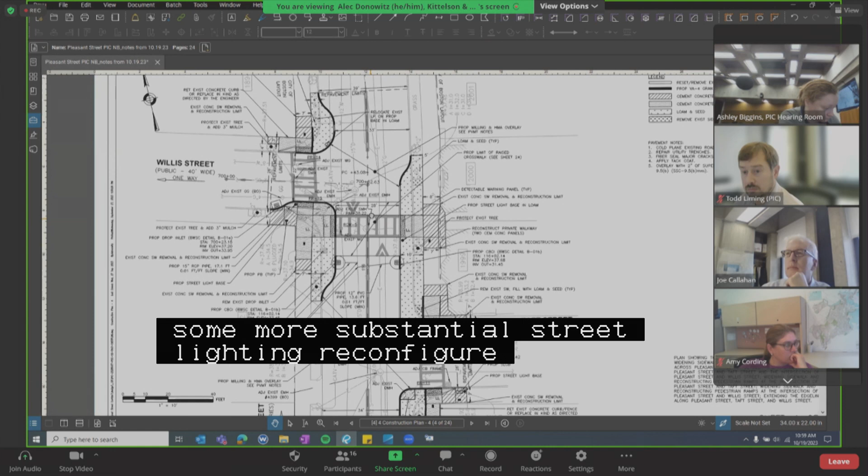In this location, we also are proposing some more substantial street lighting reconfiguration in the area, coordinated with the street lighting division, and drainage infrastructure adjustments and proposals as necessary with the raised crosswalk and curb extensions proposed.

The next intersection is Pleasant Street and Howes Street. We are proposing to realign the edge lines along Pleasant Street and Howes Street to tighten the radii in order to provide the space necessary to construct two directional and compliant pedestrian ramps.

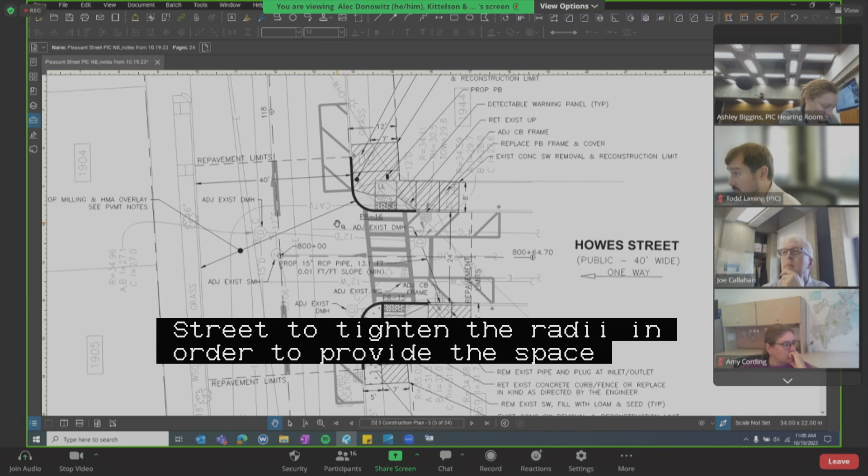We are also proposing striped daylighting for the crosswalk and along Pleasant Street in order to ensure sight lines from Howes Street drivers are sufficient to see oncoming traffic along Pleasant Street. No drainage infrastructure is proposed here, and street lighting infrastructure as well is not proposed at this location.

And finally, the most substantial intersection reconstruction is at Pleasant Street, East Cottage Street, and Pond Street, starting at the south end. We are proposing to adjust the edge lines along Pleasant Street and construct two new pedestrian ramps, replacing the existing pedestrian ramps that are currently farther south, bringing the crossings closer to the rest of the intersection and legs.

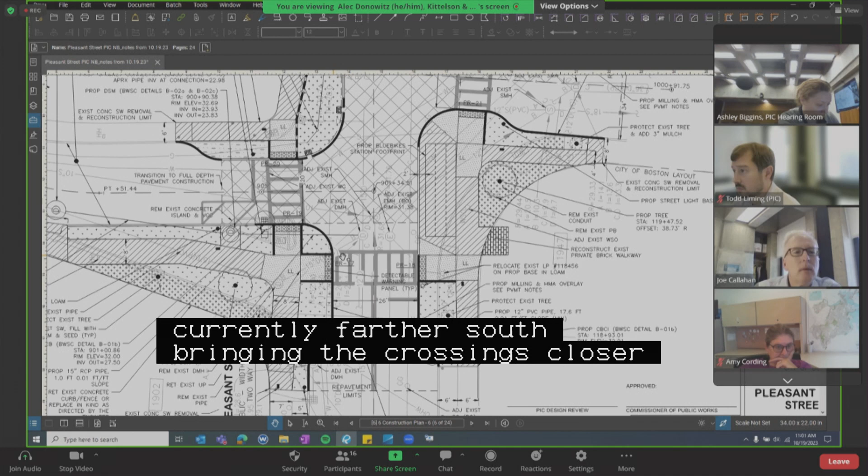We are also proposing to align the sidewalk on the southwest corner to maximize the amount of green space around an existing tree where my cursor is, and also to facilitate space to add a new tree in that area.

Continuing to the left, the west leg of East Cottage Street, we are proposing to reconstruct the pedestrian ramp on the north side near the playground, and also add a pedestrian ramp on the south side, so now we'll have 2 directional ramps on that southwest corner as opposed to today's apex ramp. We will be removing the existing concrete island today, and removing the bypass right turn lane to tighten up the intersection.

Continuing north, we are proposing a bio-retention area, green stormwater infrastructure with 3 inlets in front of the playground here, between the sidewalk and the roadway.

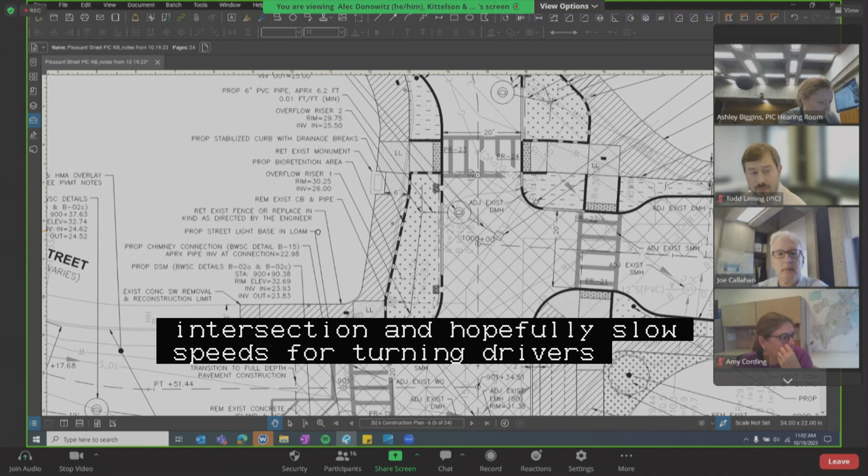Continuing north, this is the proposed crosswalk Dan mentioned earlier. We're proposing a new crosswalk across Pond Street in the northern leg here, with 2 new pedestrian ramps to facilitate travel to the playground on the west side. This connection does not exist today, but we heard from the public it's definitely desired.

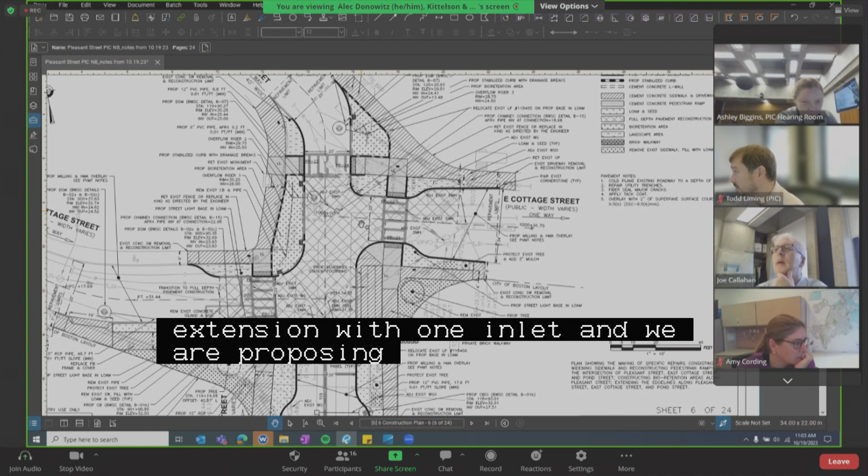Over in the northeast corner, we are proposing to replace an apex ramp with 2 directional ramps, and also proposing a bio-retention area in the northern section of this curb extension with 1 inlet. We are also proposing landscaped areas a little more substantial than loam and seed as in other areas along the corridor, in the curb extensions that include bio-retention areas where there is not enough space for a dedicated bio-retention area.

We are also proposing to construct directional pedestrian ramps across the east leg of East Cottage Street, replacing an apex or misaligned ramp on the north side and a skewed ramp on the south side. Curb extensions will shorten all of the crosswalks and significantly reduce the impervious area in this intersection, making things operate more orderly and predictably for everyone on the street.

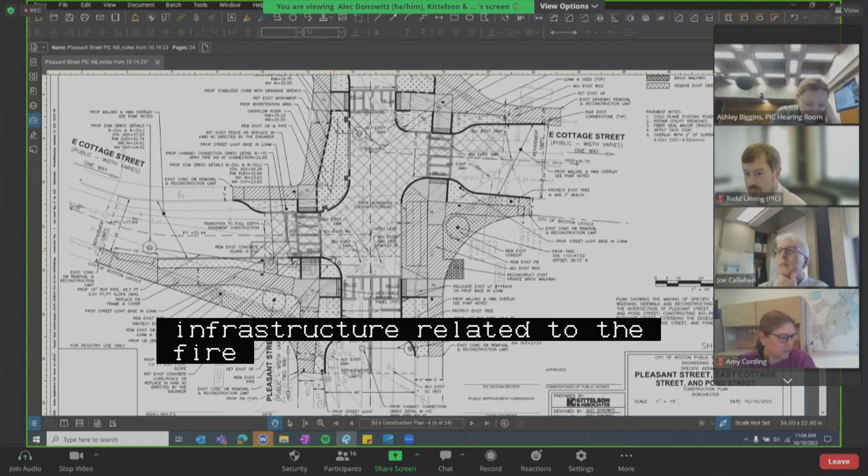We are also proposing substantial street lighting changes as coordinated with the street lighting division, and substantial drainage infrastructure related to the bio-retention areas as well as catch basins necessitated by the substantial curb extensions. Full depth reconstruction will be done within the main area of the intersection, as with these curb extensions and reduction of pavement area, it'll be necessary to ensure proper drainage and grading.

All right, thank you for walking us through that with such good detail. Commissioners, any questions, comments?

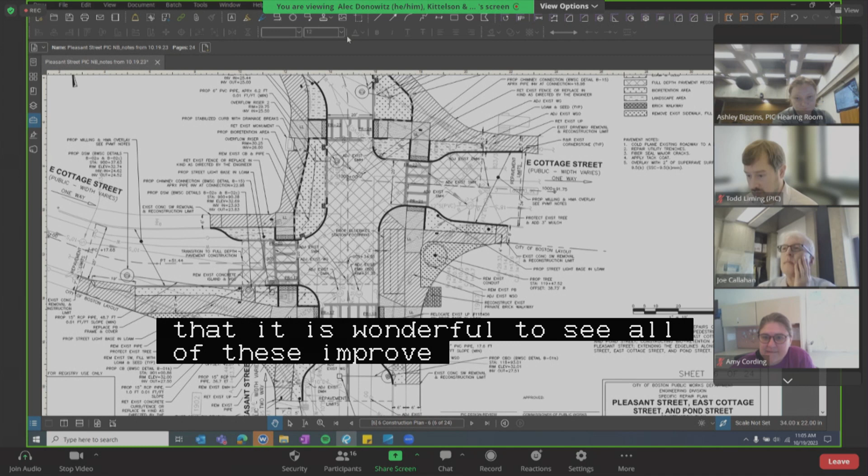I will offer the comment that it is wonderful to see all of these improvements here, but in particular this intersection that we have on the screen right now was a problematic intersection that was adjusted with some quick build intervention a few years ago, and it's great to see the follow-up with a full and very thoughtful redesign of that intersection. So appreciate that work and the pathway there.

PIC staff or members of the public, questions or comments? I don't see any. I think we're all set.

Just two other things that I wanted to confirm. One, much further up south on Pleasant Street, you talked about a driveway realignment at 69 Pleasant, and I'm wanting to confirm what kind of engagement has happened with the residents or owners of that building. I will have to double check with our planners to confirm that. I know that there was some discussion, but I don't know the degree of it off the top of my head.

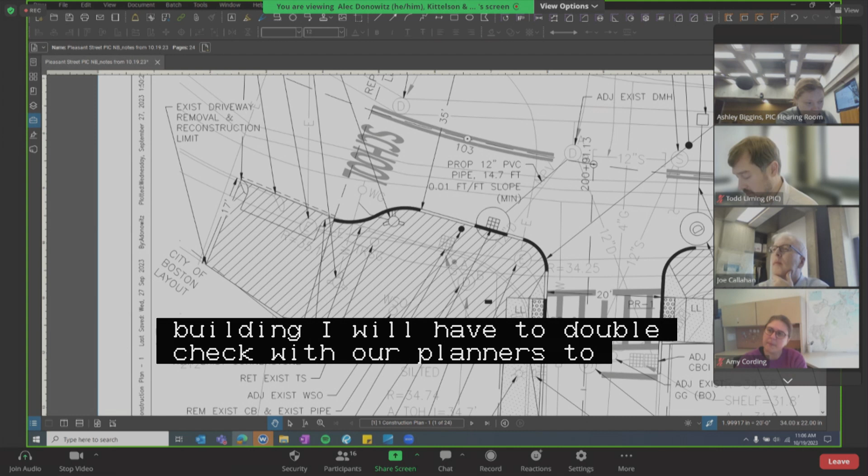Okay, that would be great if you can, at your public hearing, provide an update on that. Occasionally people get a little surprised when we rebuild their driveways, so I want to make sure we head that off.

The second question is, I know that much of the planted area here is really just an extension of the existing seeded or grass verge on the road, but it does seem like there's more substantial green infrastructure at the intersection by the playground. What is the expectation for maintenance of any new green infrastructure elements, such as those requiring stormwater flow cleaning and maintenance? Is that covered under one of our existing green infrastructure maintenance contracts?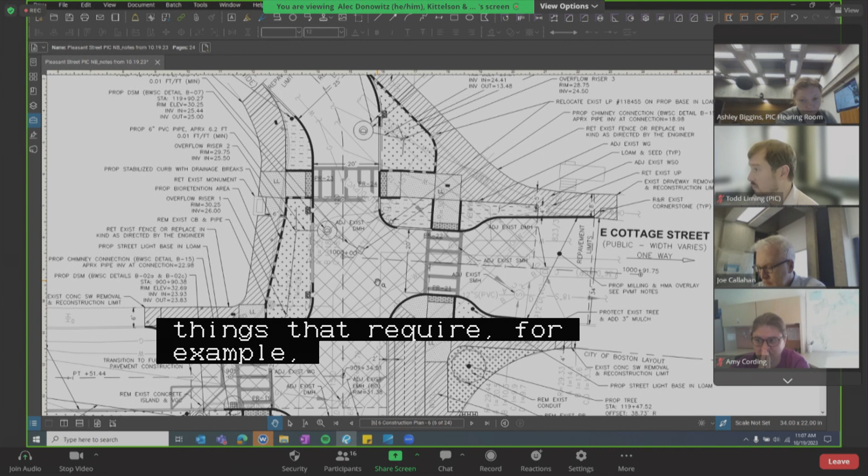Yeah, we have been working with Kate England closely to make sure this matches what she needs to be able to maintain it. Great, excellent. All right, I have no other questions.

Sounds like nothing else from the commission or from the commission staff. No raised hands, so with that, will you be ready for your public hearing in 2 weeks? Yes. All right, we will see you on November 2nd. Thank you very much. Thank you.

On to new business item 3, Commonwealth Avenue, Chiswick Road, Sutherland Road, Brighton, specific repairs on a petition by the Massachusetts Bay Transportation Authority. Would the petitioners please introduce themselves, their affiliations, and walk us through what is being proposed?

Good morning, Commissioners. Hope everybody's having a good day. I'm Dino DeFranco, Municipal Liaison for the MBTA's Transformation Program. And with me is Curley Champion, the MBTA Project Manager for Green Line Transformation.

Just a little bit about why we're here. We're here for 2 stations on the B branch Green Line. It's a grade crossings improvements project, and it's FTA mandated. They were also nice enough to give us a construction deadline — they want the work completed by the end of the year, December 31st, 2023.

Just to let you know, the work at Chiswick Road Station and Sutherland Road Station is short-term work to remove barriers to access so people can cross Com Ave and get to the MBTA right-of-way at marked crosswalks, curbing, and removing other obstructions. These short-term measures will be constructed and remain in place until permanent crossings are constructed together with planned station upgrades at both stations. So this is a short-term fix mandated by the FTA until we can make them permanent.

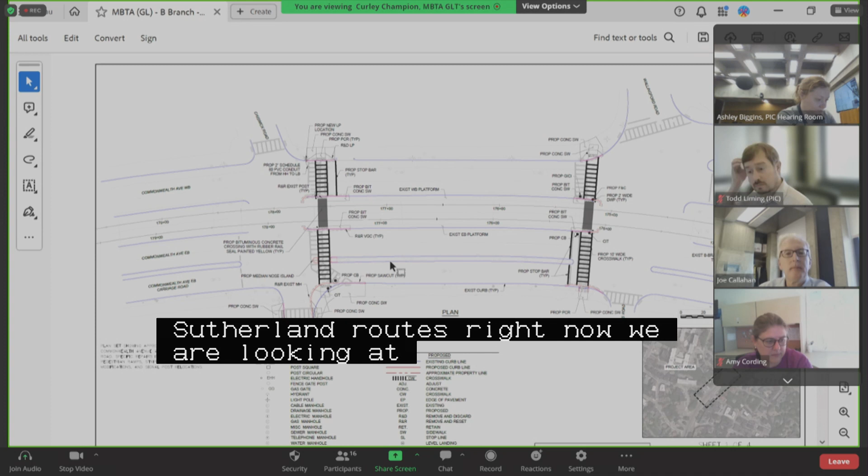So our plans cover repairs at 2 locations on the B branch, specifically at Chiswick and Sutherland Roads. Right now, we're looking at the Chiswick Road Station, where new curb ramps will be installed on both sides of the platform, as well as the eastbound portion of Chiswick Road. We'll also have modified curb radius improved on the eastbound side of the platform at Chiswick Road, and newly painted crosswalks on both sides of the platforms — Wallingford Road side, Kinross Road side, and Chiswick Road side.

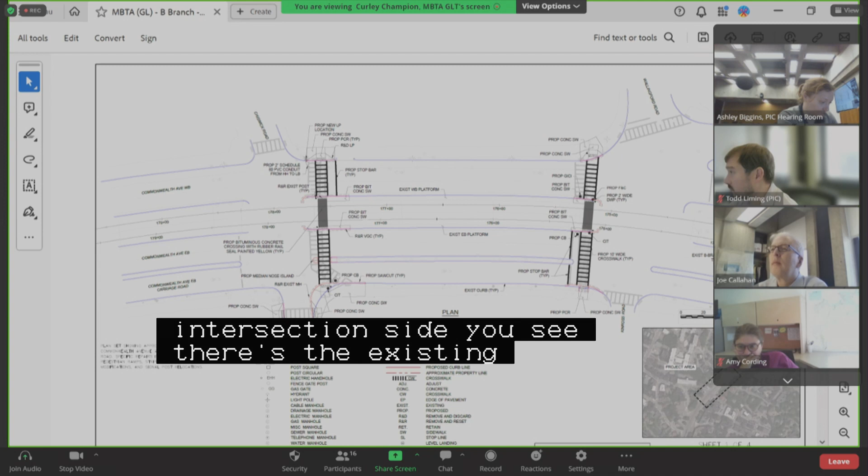We'll also have improved, realigned crosswalks at the intersection. As you see, there are existing crosswalks on each side, so we'll just realign and improve those crosswalks at Chiswick Road. Any questions so far? Taking that as a no, I'm going to shift you guys out of the way.

Sorry? These are all the plans, or? Yeah, well, we have this — you're looking at Chiswick Road, and subsequently would be Sutherland. We've got a separate plan for Sutherland Road. Okay, and I think we can just move through both of them, and then we'll come back if there's questions. Okay, so moving down to Sutherland.

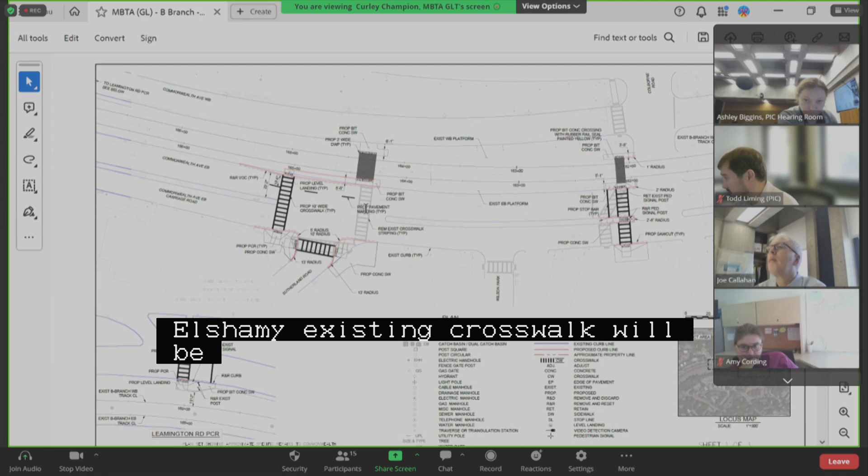All right, so for Sutherland, we are planning to construct a new slope walkway, seen here, improving the curb entrances, similar to Chiswick, on each side of the platform. We're also improving and realigning the crosswalks at the intersections of Colborne Road and Com Ave. As you see the L-shaped existing crosswalk, we'll be realigning and restructuring it, and the plan is to remove the existing crosswalk and shift it over to the opposite side of Sutherland Road.

Yeah, I think that's what I have — just making sure I'm reading my notes correctly. So very similar to the previous slide, at Chiswick Road we are improving curb ramps and modifying and improving crosswalks on both sides of the platform or reservation area. Great. Commissioners, questions, comments?

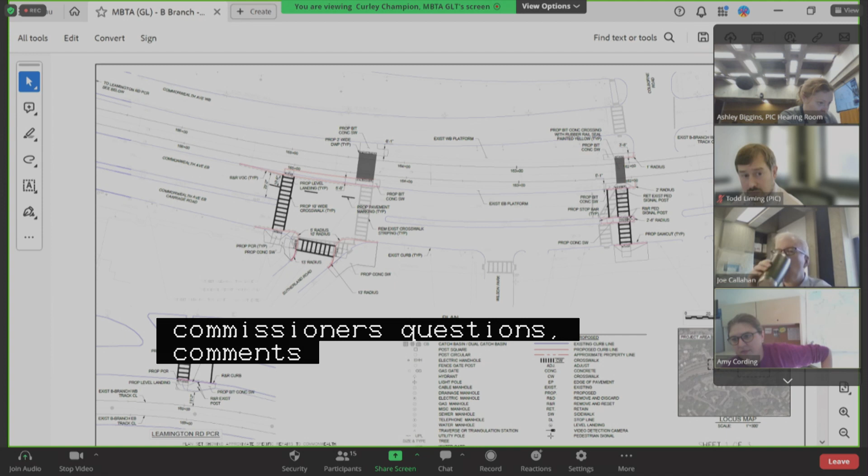Maybe more of a question for Sarah, but in some of these locations you are bringing the nose of that median over to the other side of the crosswalk, which is good and protects the crosswalk. In some locations you're not — is there a reason? Could we have the physical piece on both sides of the crosswalk?

I could take that down. I'm not sure if it was a look-over, if we just happened to miss it, but I can take that down. In both locations, you do one of them, but not the other.

I will take that down as a note, just to make sure. So Amy, what was that? Was that the curb cuts, or what was that again?

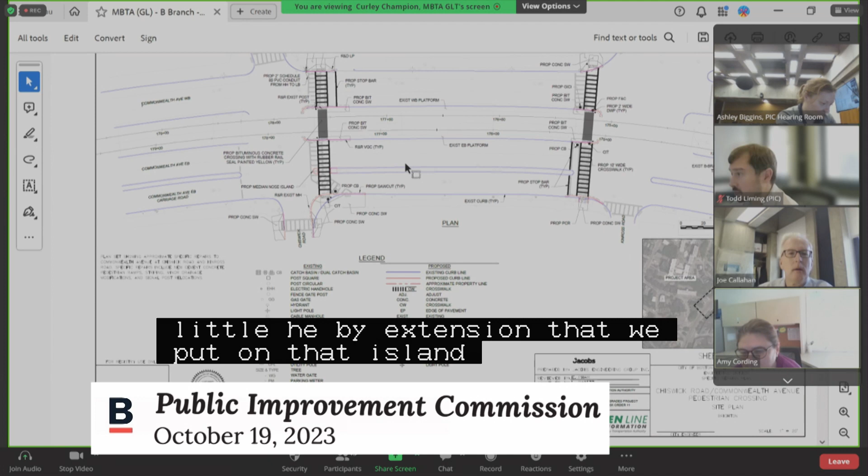Yeah, circling the little pink extension that we put on that island on the opposite side of the crosswalk. Well, the same thing should be on the other side that you see here, and then also at the other location, it's the same thing where there's one there and one.

Amy, I'm betting that may be just a typo, but I will get back to you this afternoon with that answer. If it's a typo, I'll just correct it. If there's a reason for it, I'll get it over to you, but I'll make sure that happens this afternoon.

Commissioners, other questions?

I will just say that if we had a competition for the goofiest crosswalks in Boston, this one at Chiswick Road would almost certainly be a contender, so I am very happy to see it getting fixed. Commissioner, I knew you were going to be a fan of these new crosswalks. Yeah, these are some bad spots. We've had that discussion previously, you and I, so I knew you'd like this.

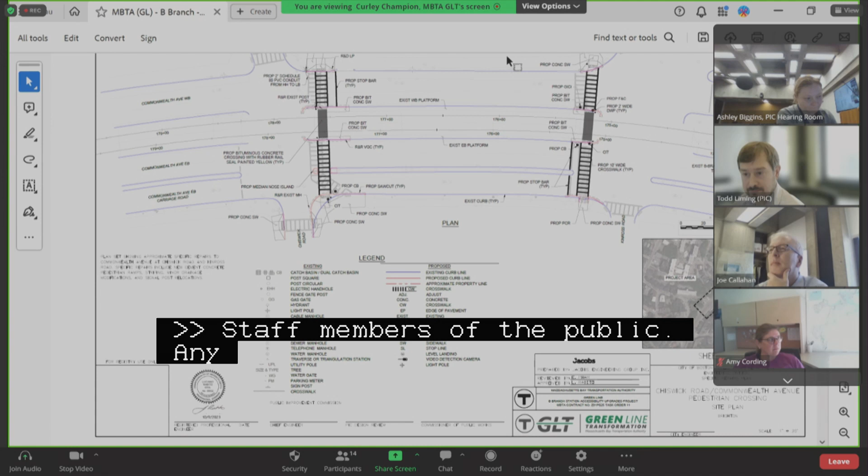Thank you. Take care. All right, last but not least, new business number 4, Chestnut Hill Avenue, Beacon Street, Brighton, grant of location on a petition by Verizon New England Incorporated. Would the petitioners please reintroduce themselves and give us an overview of what is proposed here?

Yes, good morning. Again, Ross Billiter, representing Verizon New England. Sharing my screen here. Okay, everybody should be able to see that? It's not yet, but there we go. Yep, got it, okay, cool.

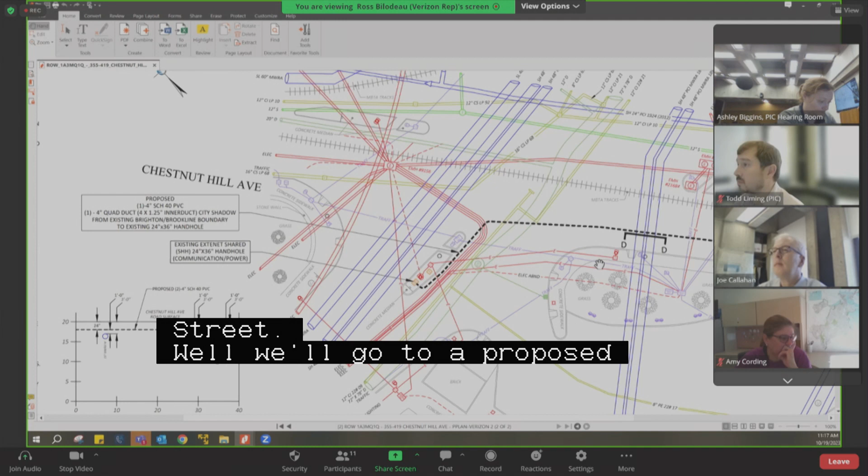Verizon is proposing approximately 415 feet from an existing manhole, 38 over 502A, which is actually in Brookline, running down Chestnut Hill Avenue, across the city line here, shown right here, to the intersection of Chestnut Hill and Beacon Street, where we'll go to a proposed shared handhole. It may be important to note that we have reached out to the MBTA to see if they had any concerns, and they had no comments regarding this dig. And this Brookline portion of the work was already approved as well.

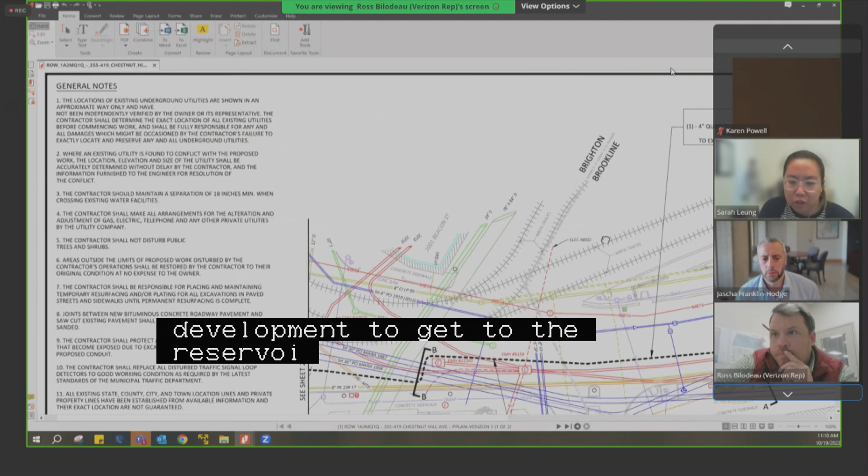Commissioners, any questions, comments? I'm not sure if this falls within Brookline jurisdiction, but there is a crosswalk frequently used by residents of the nearby development to get to the Reservoir station, and we just want to ensure that remains accessible during construction activities. Sure, and it might fall within Brookline jurisdiction, but Boston residents do use that as well. Right, I know this is a very busy area, so we will ensure that we take care of those folks.

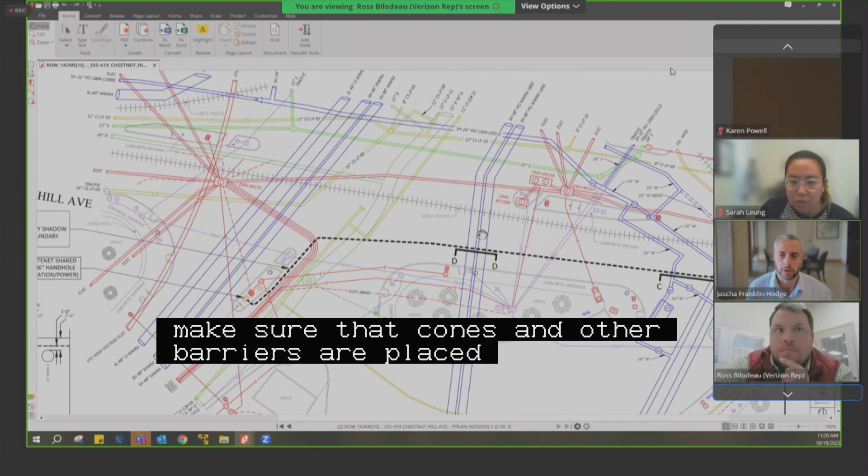I have a bike-related thing here. I believe that part of this traverses a section of Chestnut Hill Ave at Beacon where there are cross bike markings guiding people across. Those markings have a specific angle alignment to ensure people on bikes are not crossing the tracks at too acute an angle such that they get caught and fall. So during construction, it's important to make sure cones and barriers don't force bikes to cross the tracks at an unsafe angle. Post-construction, immediate restoration of the pavement markings that guide people across the tracks safely is essential. Make sure that's factored into your construction management plan, and your contractor understands the need for quick restoration of disrupted pavement markings.

Okay, yes, absolutely. I will bring that to their attention.

Commissioners, any other questions, comments? PIC staff or members of the public? Ross, you said that this line is leading to a new shared handhole. Can you confirm that's to service a new DAS node on a streetlight? All I can really say is it's being placed by ExteNet, so I'm not sure what the purpose is. I just know that we're trying to get fiber over to it.